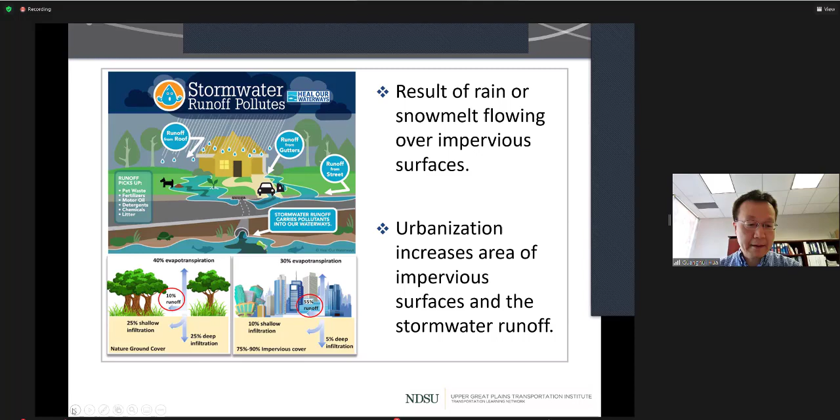So therefore, stormwater management has been a major concern for urban areas. And as we continue to expand urbanization, we need to properly manage stormwater runoff in order to reduce the flood risks and other concerns. And in addition to the stormwater quantity, stormwater quality is also another major concern, because when the stormwater runoff flows through the surfaces, the runoff can carry a large amount of contaminant.

Here I have several major lists of the potential contaminants resulting from stormwater runoff, including nutrients such as nitrate and phosphate, organic chemicals, oil and grease, heavy metals, primarily copper and zinc, and some suspended solids such as sand and other particles. And also, stormwater can also carry microorganisms such as virus, bacteria, and others.

And in order to manage stormwater runoff, cities and municipalities have developed many tools that can control stormwater runoff. Here I have several major examples. The first one is a detention basin. Detention basin is a dry pond. Basically, that basin will temporarily hold runoff and release over a designated time period, such that we can reduce the flooding risk when the storm event occurs.

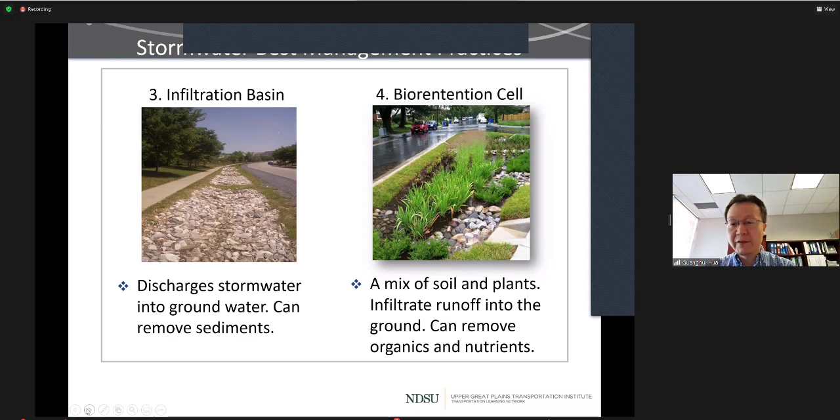And for this project, our focus is E. coli, because many of the current best practices are not effective at removing bacteria such as E. coli. So this is the focus of this project. And E. coli is widely used as an indicator of fecal contamination. And if there are any fecal contamination, E. coli can indicate the presence of those contaminants. And E. coli is a group of gram-negative bacterium, and they are rod-shaped.

So actually, most of the types of E. coli are harmless. They don't cause health problems. But however, certain types of E. coli, such as E. coli O157:H7, can produce a powerful toxin. So if people consume that E. coli contaminated water, some symptoms can develop, such as diarrhea, vomiting, and fever. So that's why E. coli is a major concern in surface water quality.

In order to regulate bacterial contamination in surface waters, EPA developed national recommended recreational water quality criteria. Based on the estimated illness rate, if the regulation is for 36 illness rate per 1,000 people, the 50th percentile is 126 per 100 ml. So if you want to reduce the illness rate to 32 per 1,000, the E. coli concentration for 50th percentile should be 100 per 100 ml.

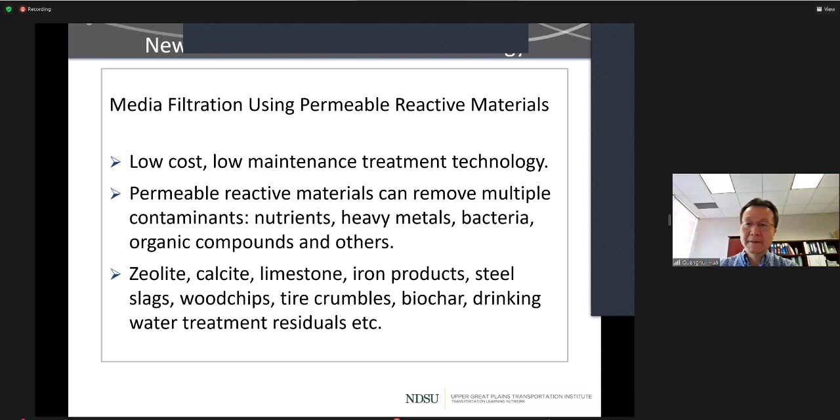Here I have two examples of media filtration technology to address stormwater quality issues. The first one is a steel slag filter. This filter is installed at Stillwater Country Club in Oklahoma, and this technology was developed by Oklahoma State University. When the runoff flows through the steel slag filter, nutrients such as phosphorus can be absorbed by the steel slag. The other example is called an iron sand filter.

This technology was developed by the University of Minnesota, and I have one installation example at Prior Lake, Minnesota. So basically, iron and sand are mixed and installed in the filtration channel. When the runoff flows through the channel, phosphate will be removed by the iron sand filtration. So these two examples give you an idea of how the field installation would look for media filtration for stormwater treatment.

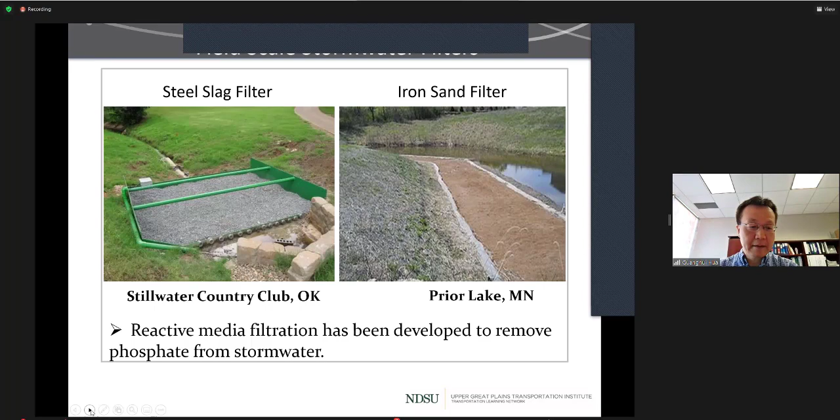And for this project, we focus on two recycled materials. The first one is called recycled steel chips. And we selected recycled steel chips for two reasons. The first one is that they are low cost and readily available for stormwater treatment. And the second reason is that when these steel chips oxidize, they can form iron oxide on the surface. And iron oxide is the material that we are using for stormwater treatment.

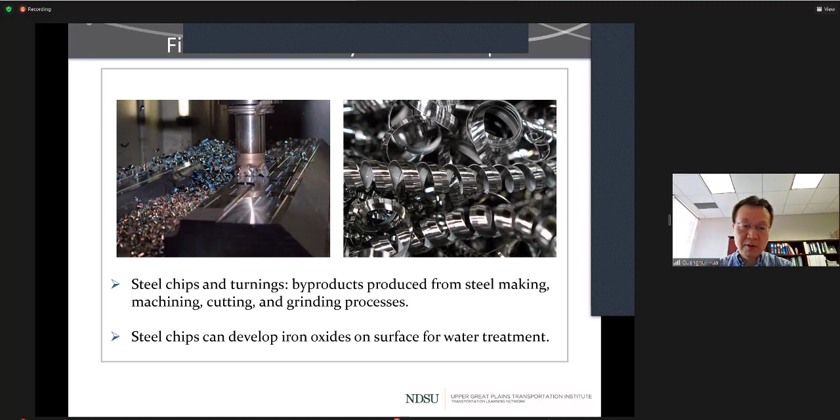And the second group of material that we are using for this project is called steel slag. Steel slag is a byproduct of steel making, and it contains also iron oxide and magnesium oxide. And they are produced during the separation of the molten steel from impurities. So basically, they are the impurity from steel making.

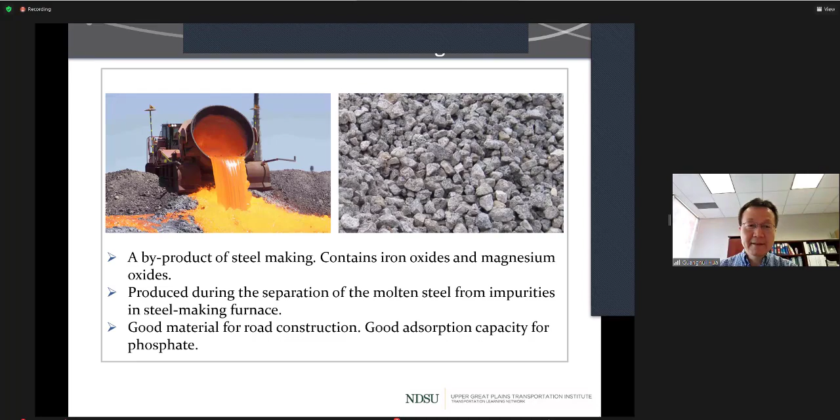And this material has been used by transportation agencies for road construction. They are very good material, alternative material for road construction. And we found out from other studies that steel slag also has a very good adsorption capacity for phosphate. So these are two materials that we focused on during the development of media filtration for this project.

So these are the project objectives for this study. So first, we want to develop a low maintenance, low cost media filtration system for stormwater treatment. Specifically, we are using recycled steel byproduct, including steel chips and steel slag. And the treatment goal of this filter media technology is to remove E. coli from stormwater runoff. And also, in addition to lab studies, we want to perform a field study to determine the long-term performance and the application potentials of this technology for real stormwater treatment. So these are the three objectives for this project.

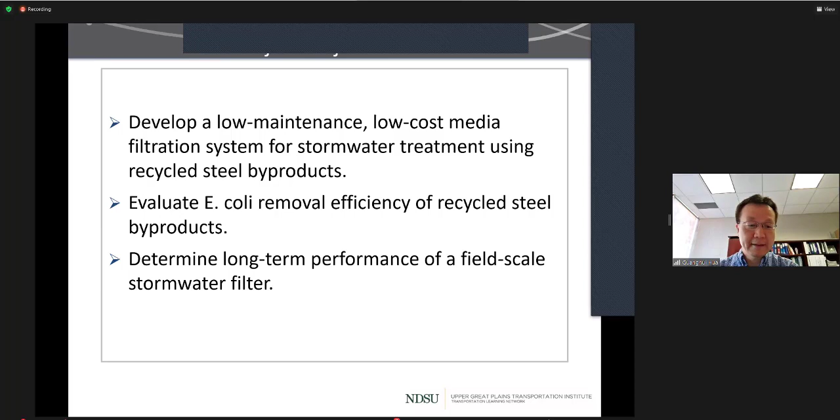And we divide this project into three phases. Phase 1 and phase 2 are lab scale, and we conduct batch adsorption studies to evaluate different materials for E. coli removal. And through the batch study, we were able to identify the most efficient materials for E. coli adsorption. Following the batch adsorption study, we conduct a column study under continuous flow conditions. And we select those materials identified from the batch study for the column study.

So after we complete the batch and the column studies, we identify a field study site at the city of Brookings in South Dakota. And we installed a field scale filter, and we determined the long-term performance of the field scale filter over a 3-year period to evaluate E. coli removal under field conditions. So these are the three phases of this project, and I'm going to present the results based on the three phases.

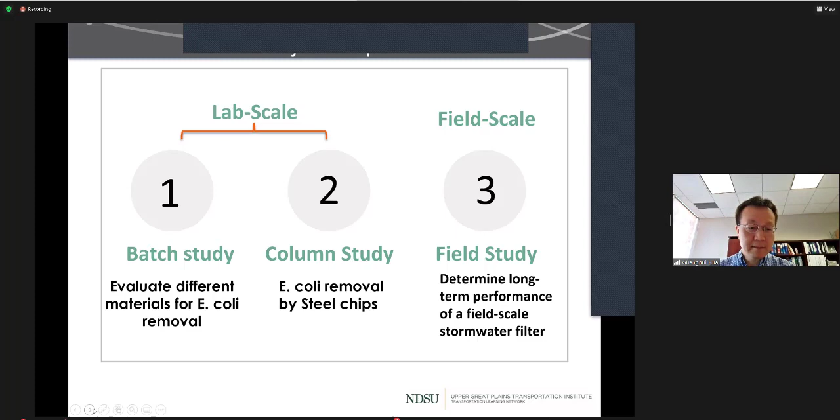So during the batch experiment study, we selected 4 materials, including limestone and zeolite. These are the 2 natural materials that are readily available. And these 2 materials have been evaluated as stormwater treatment material, filtration material for phosphate removal. And we want to know whether these 2 materials can also remove E. coli or not.

In addition, we select 2 recycled steel byproducts. Steel chips, and we collect material from 2 recycling companies, one located in Sioux Falls, South Dakota, and the other one located in Marshall, Minnesota. So we collect recycled steel chips from 2 locations. And also we collected steel slag from a steel making company, Nucor Corporation in Nebraska.

And this is the batch study design. First, we select the adsorption material, and we use sieving to collect the material that is in the 1 to 2 millimeter range. And following that, we create simulated E. coli solutions. So basically, we grow the E. coli media in the lab, and then we dilute the E. coli culture into different concentrations from 10 to 10^4 per milliliter.

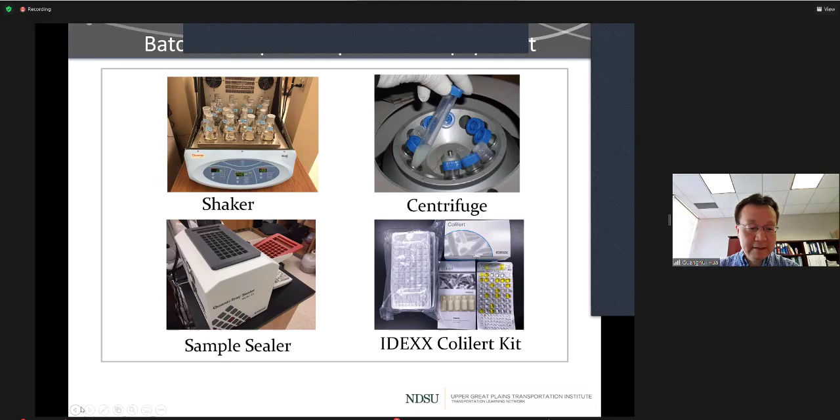In addition, we found that the adsorption capacity of steel chips is more than 1,000 times that of the other materials. So we had to divide the steel chip result by 1,000 in order to put all the data points into one scale. Therefore, steel chips are much more effective compared to other materials. We also found that steel slag is a better adsorbent material than zeolite and limestone, which are natural minerals. So this is the result we found based on the first set of batch adsorption study.

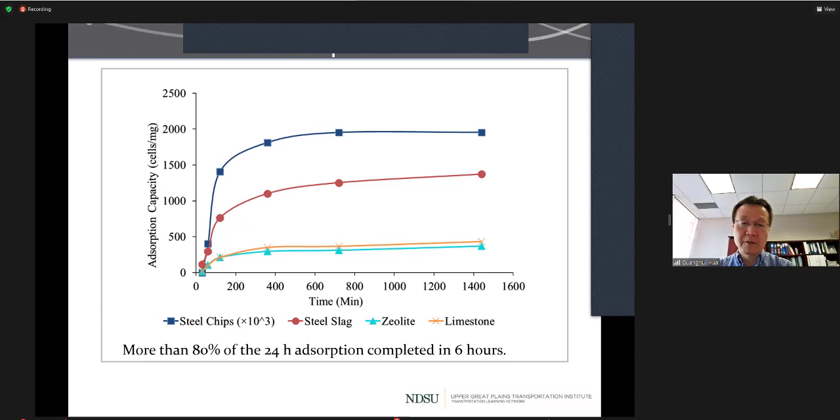We also evaluated the impact of different influent E. coli concentrations on the adsorption efficiency of the four materials. For steel chips, over a wide range of influent concentrations, the removal efficiency did not vary much. It varied from 89.5 to 92.7 range. So we were able to achieve very good removal efficiency over a wide range of influent concentrations. We found that the influent concentration had a larger impact on steel slag, limestone, and zeolite. We also found a similar removal efficiency order as the kinetic study.

So overall, based on the E. coli removal at different concentrations, we conclude that steel chips are much more efficient than steel slag, which is more efficient than limestone and zeolite.

For temperature impact, based on our result for steel chips and steel slag, we learned that for 20 degrees C and 30 degrees C, the differences are minor, and we were able to maintain good removal for the two temperatures. However, when the temperature dropped to 5 degrees C, the removal efficiency substantially reduced. Therefore, we expect that during early spring runoff, when the stormwater runoff temperature is close to the freezing point, the removal efficiency will be reduced. This is likely because the mobility of E. coli under low temperatures will become much less compared to normal stormwater runoff temperatures.

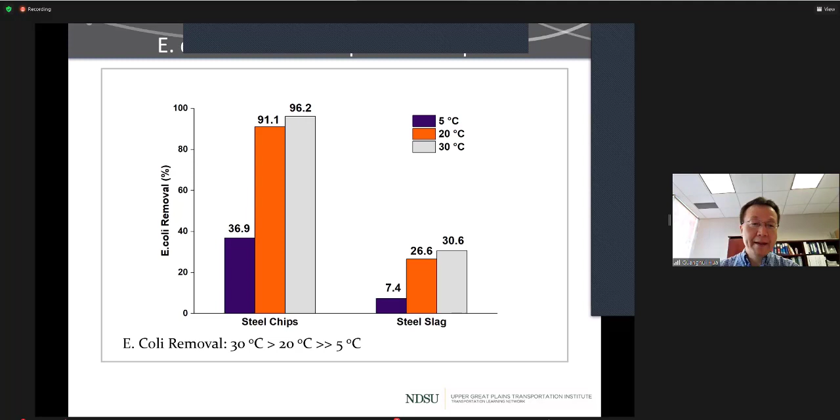We also looked at the pH impact. We know that the stormwater runoff pH can vary based on road conditions and seasonal variations. Based on our batch adsorption study, we learned that acidic pH can help the removal of E. coli. However, the difference between pH 5 and neutral pH is minor. We achieved good removal for the two pH values. However, at high pH values, the removal efficiency substantially reduced. So basically, under acidic conditions, steel chips and steel slag had a better performance compared to alkaline pH conditions.

And this is the summary based on the batch experiment. First, perhaps most important, we identified that steel chips are much more efficient than steel slag for E. coli removal, and steel slag was better than limestone and zeolite. So this is the order of removal efficiency among the 4 tested materials. Also, steel chips exhibited at least 1,000 times higher E. coli adsorption capacity than other materials. And environmental conditions can impact E. coli adsorption; the adsorption typically increases with increasing temperature, and increases with decreasing pH values.

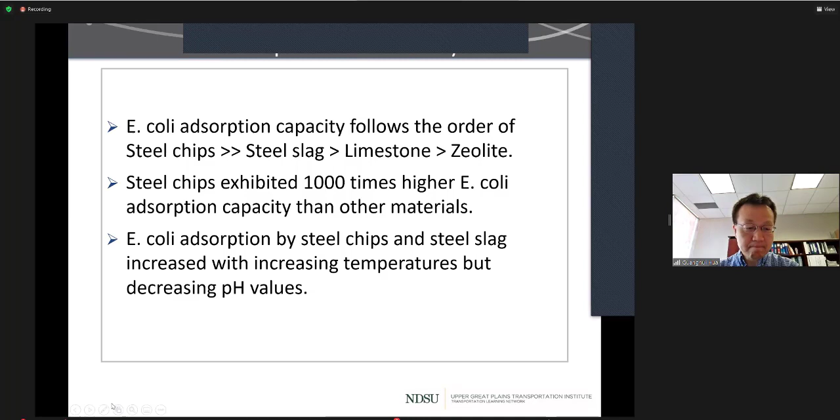So after the batch study, we identified steel chips as the most efficient E. coli adsorbing material, followed by steel slag. Therefore, we decided to perform an additional column study to evaluate the removal efficiency of steel chips under continuous flow conditions, because the column experiment conditions are closer to real stormwater filter treatment conditions, as we continuously push the water through the filter medium.

So this is the setup for the column study. We have a glass tank that holds the influent, simulated stormwater runoff that has different E. coli concentrations. We use a peristaltic pump to pump the influent through the column that contains steel chip media. And we measured the influent and effluent concentrations to determine the removal efficiency during continuous flow conditions.

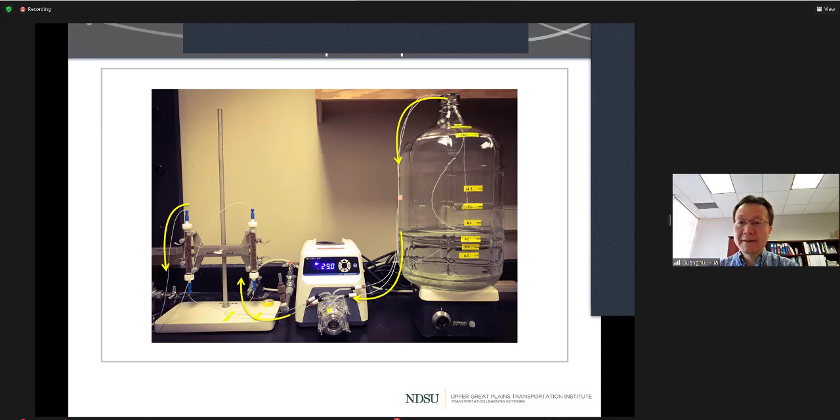So once again, these are the materials that were used for the column study, and we sieved the material into different sizes. 0.5 to 1 is considered fine material, then 1 to 2, 2 to 4, and 4 to 8 millimeter. The 4 to 8 millimeter size is considered coarse material.

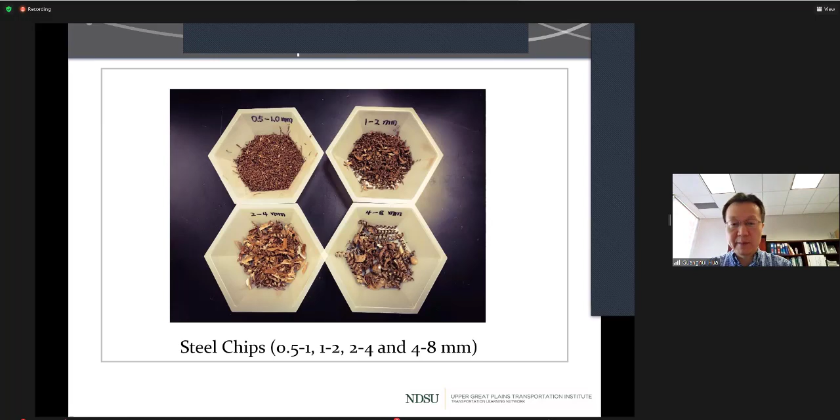We look at the size impact, different sizes of material on E. coli removal. And we learned that as the size becomes bigger, the removal efficiency gradually declines. For example, for the fine size particles, 0.5 millimeter to 1 millimeter, we were able to achieve constantly about 99% removal. And as the size increases, the removal efficiency gradually declined to about 58% for the highest size material, which is 4 to 8 millimeters.

And also we learned the removal efficiency was very stable over the 72-hour period, even though there is some early breakthrough between 0 and 6 hours. But after 6 hours, we were able to maintain very stable removal. And the removal efficiency did not decline between 12 and 72 hours. So therefore, this result is important, and this can indicate that steel chips are able to maintain stable removal over a long period up to 72 hours.

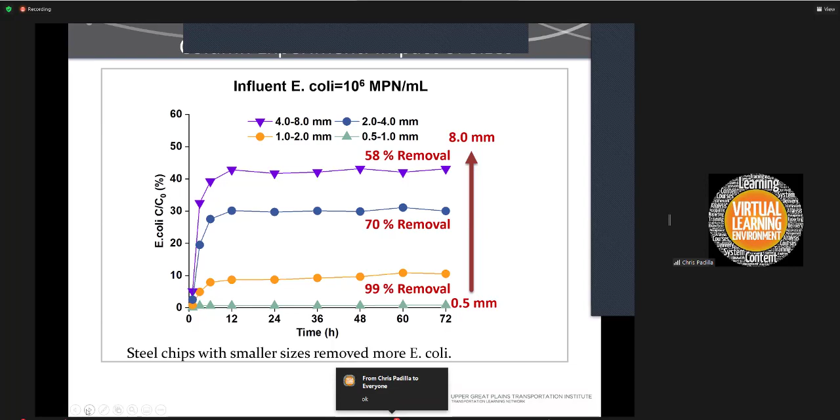Dr. Hua? Yes. So just to check the understanding, are the percent removal stats showing the percent of the total coliform loading or the percent of the 24-hour removal? The removal percentage indicates how much is being removed by the steel chips. For example, if the influent concentration is 100 per ml and 99% is removed, then we only have 1 in the effluent. Okay, thank you. And the y-axis indicates effluent concentration percentage. So 100 minus the y-axis is the removal efficiency.

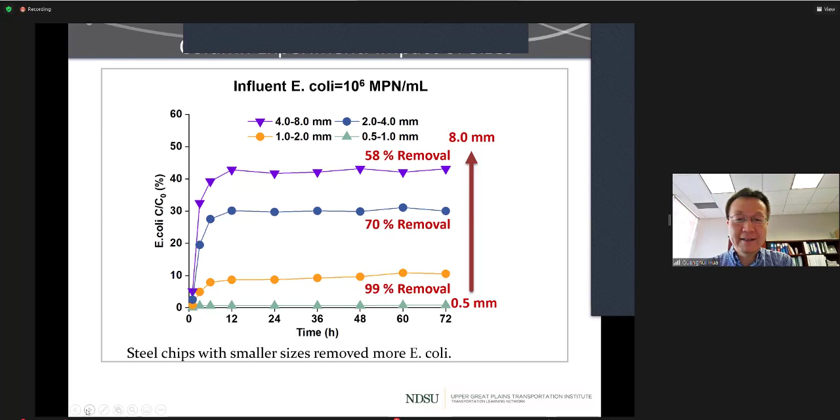So here we also look at the impact of contact time on the removal of E. coli through the column study. Once again, the y-axis indicates the ratio between the effluent to the influent. And I put the removal numbers for each of the lines for easy understanding. And we evaluate 3 contact times. EBCT means empty bed contact time. That's the travel time of water through the filter column. And we evaluated 5 minutes, 10 minutes, and 20 minutes.

And based on our results, we observed that when the EBCT or contact time is 5 minutes, we were able to maintain 87% removal over 72 hours. And when we increase the contact time to 10 minutes, we were able to achieve, I think, roughly 90% removal. And when we further increase the contact time to 20 minutes, we were able to achieve 98% removal.

Overall, for a wide range of contact time, 5 to 20 minutes, we were able to achieve very good removal efficiencies. So that means this filter technology can be adopted to different stormwater events that have different flow volumes, which will result in different filter contact times.

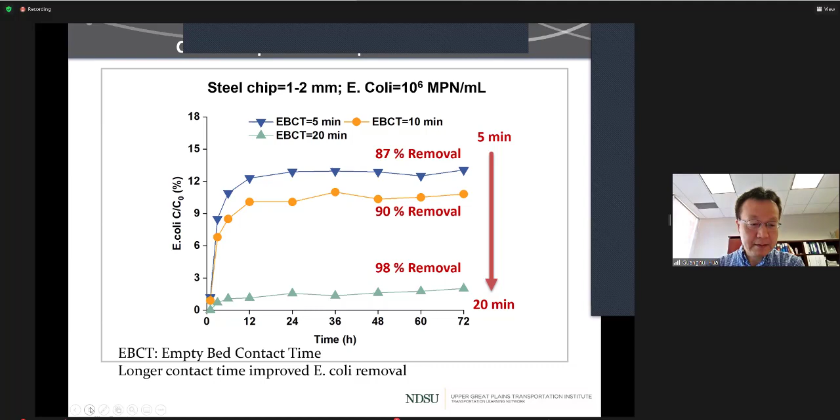And also, in order to confirm the pH impact from the batch study, we also compared the pH impact on the E. coli adsorption efficiency. We did observe that the acidic environment favored E. coli removal. So at pH 5, we were able to achieve 95% removal. And at pH 7, the removal efficiency reduced to 90%. And we observed some interesting results at pH 9. If you recall, during the batch study, pH 9 had the lowest removal efficiency. We did observe the lowest removal efficiency at the early stage of the column operation at 87%. However, as we continued to increase the operating time, the removal efficiency gradually increased to 92%.

And we attributed this phenomenon to the ferric coagulation impact. We observed that some of the dissolved iron was able to coagulate E. coli and form a deposit. That's what we observed from the column study. So basically, in addition to the filtration and adsorption impact, we found at high pH values, the dissolved Fe is able to coagulate and form flocs that could trap E. coli from the water.

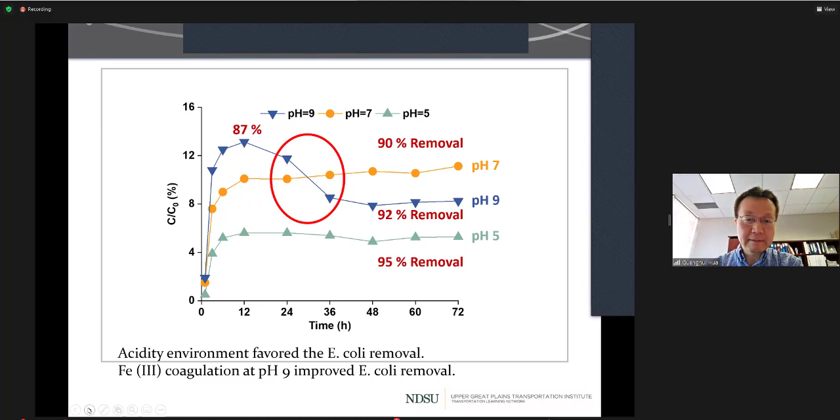Organic matter is another competitor for E. coli adsorption because when the stormwater travels through the surface, it can pick up some organic compounds, and we call those compounds natural organic matter. And we want to know whether those organics present in the stormwater runoff can impact E. coli removal or not. And indeed, this figure shows the attached E. coli against the different natural organic matter concentrations.

So the blue circles indicate there is no natural organic matter. Then we added 5 milligrams per liter of organics into the influent as indicated by the yellow triangles. And we increased the organic matter concentration to 30 milligrams per liter as indicated by the green triangles. And we found that as we increase the concentration of organics, the E. coli adsorption efficiency declined. The percent decline is 25% for 5 milligrams per liter and 50% for 30 milligrams per liter. So therefore, if the stormwater has high concentrations of organics, it may reduce the E. coli removal efficiency.

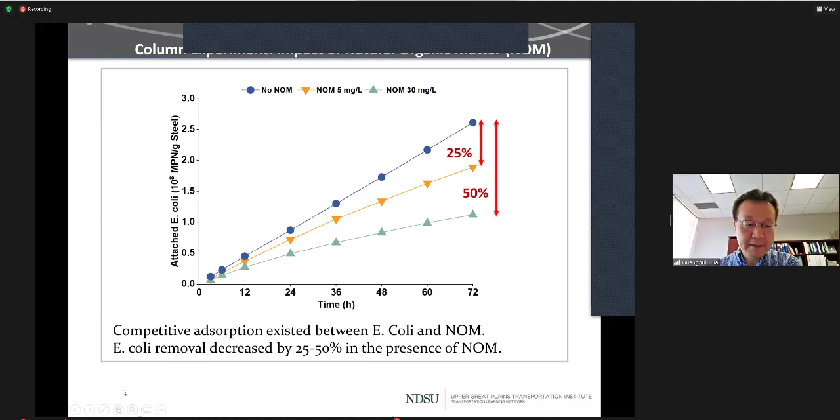And this figure shows the E. coli removal mechanism, how steel chips remove E. coli from stormwater runoff, and why pH and organic matter can have impact on E. coli removal. And we know that E. coli in aqueous solutions has some charge on the surface. Typically, E. coli species has a negative charge on the surface.

And we know that steel chip surfaces have a lot of iron oxide. Iron oxides are positively charged. So because the charges on the E. coli and the steel chip surface are opposite, they tend to attract each other through electrostatic attraction. So that's the reason why steel chips are very efficient for E. coli removal.

And under high pH conditions, we have a high concentration of hydroxide, which is OH minus, negatively charged. And those OH ions will compete for the adsorption site. So therefore, we have high removal under low pH conditions. Similarly, many organic compounds are also negatively charged. They can compete for the adsorption site. So this can explain the observed impact of pH and organic matter on E. coli removal by steel chips.

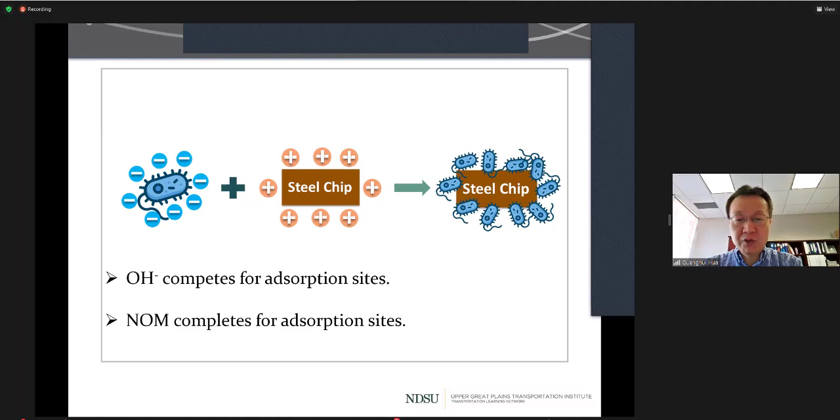And in order to verify our hypothesis, we performed some microscopic scanning using SEM technology, scanning electron microscopy, to look at the steel chip surface before and after the treatment. So figure A shows the steel chip surface before the experiment. As you can see, there are lots of crystal forms on the surface. Those are the iron oxide formed by iron and oxygen. And after treatment, we found a high density of rod type bacteria. So therefore, we verified E. coli bacteria can be effectively attached to the steel surface.

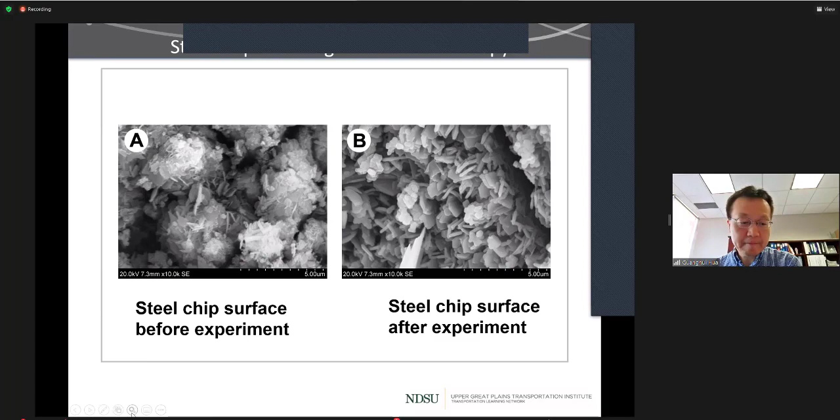So this is a summary from our column study. The steel chip column maintained steady E. coli removal up to 72 hours. So we were able to maintain steady removal over a long period. And also environmental factors could affect E. coli removal. The column exhibited better E. coli adsorption under small sizes, long contact time, and low pH levels. And also the organic matter present in the runoff can negatively affect E. coli adsorption.

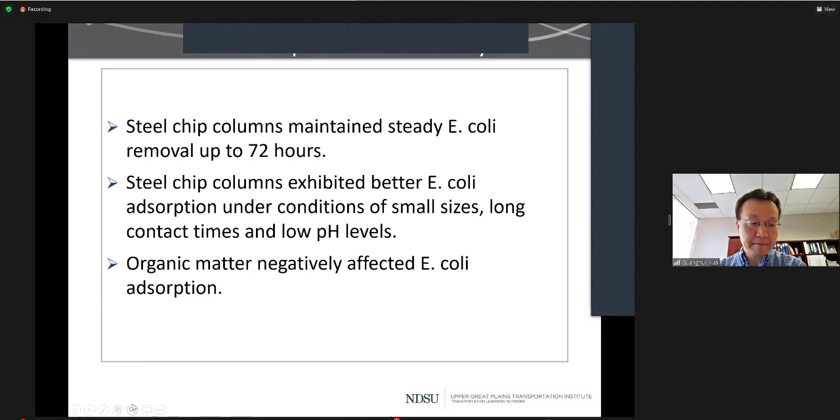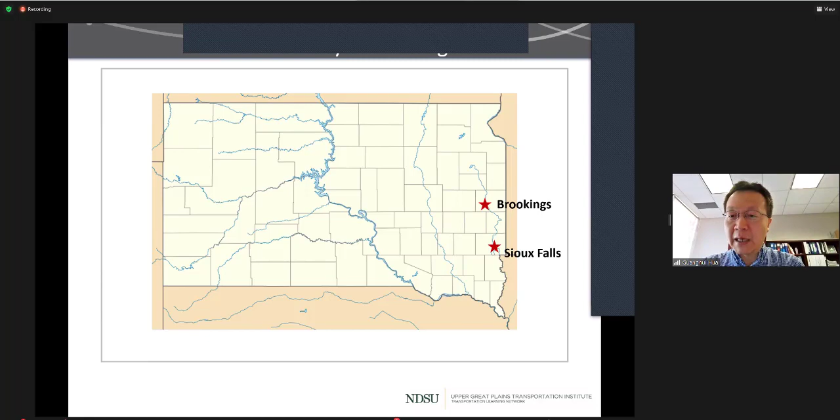So with the success of batch and column studies, we identified steel chips as the most effective material. So therefore, we want to test those materials under field conditions to verify their performance and promote full-scale applications. So we identified a stormwater runoff site at the city of Brookings. For those who do not know where the city of Brookings is, Brookings is located in eastern South Dakota. It's about 60 miles north of Sioux Falls.

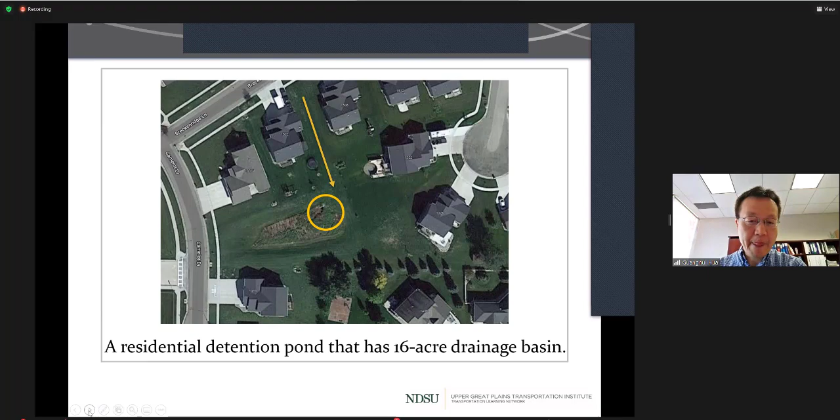And we collected two materials for this study. We use the steel chips as the major filter media for E. coli removal. We also collected steel slag as a supporting media to support the performance of the steel chips. And steel slag can also improve the E. coli removal because it is also efficient compared to natural minerals such as zeolite and limestone, based on our batch study.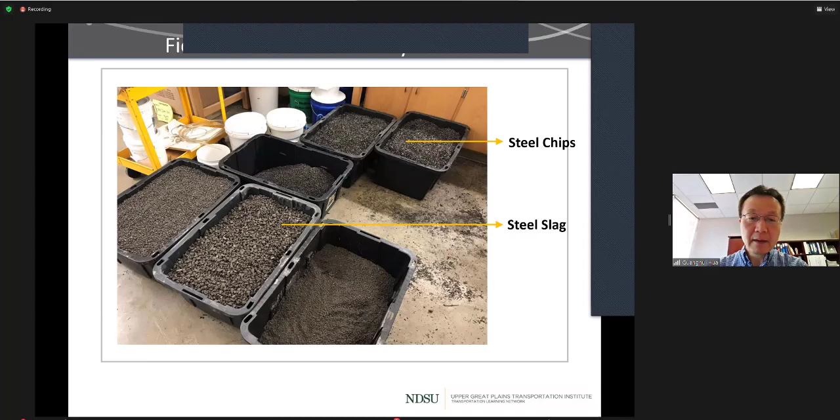And we collected steel slag from Nucor Steel, Norfolk, Nebraska. And we processed the material into two sizes, large and small, which are 4 to 9.4 millimeter and 2 to 4 millimeter respectively. And for steel chips, we collected from a recycling company in Marshall, Minnesota. And we also processed the material to the same size range as the steel slag.

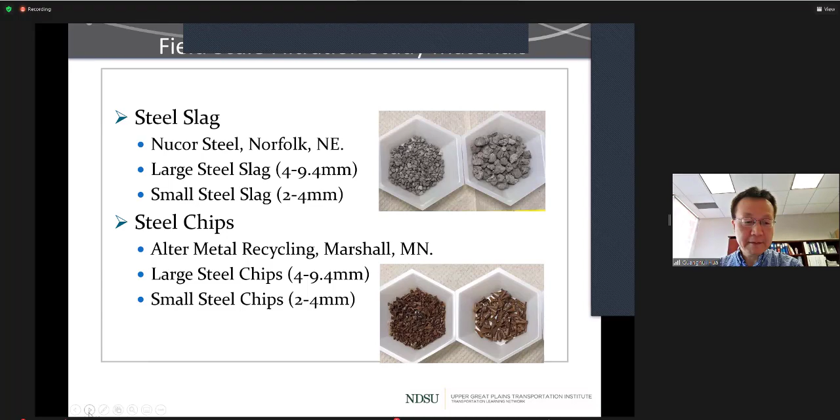And these two photos show how our graduate research assistant installed the filter media. So basically, we placed the structure at the inlet of the detention pond, and then we mixed steel slag and steel chips uniformly, and then we added them to the steel structure.

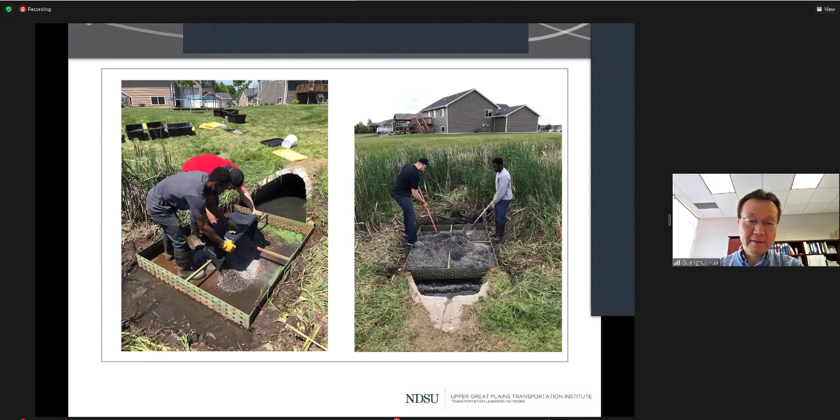And these two photos show the treatment of the stormwater runoff on the real storm event. So basically the water will flow through the pipe and then through the filter media. And we collected samples from the inlet and the outlet to compare the treatment performance for various storm events.

And these are the media conditions for the 3-year study. In 2018, we used 70% steel chips and 30% steel slag. In 2019 to 2020, we used 50% steel chips and 50% steel slag. So the total study period was 3 years.

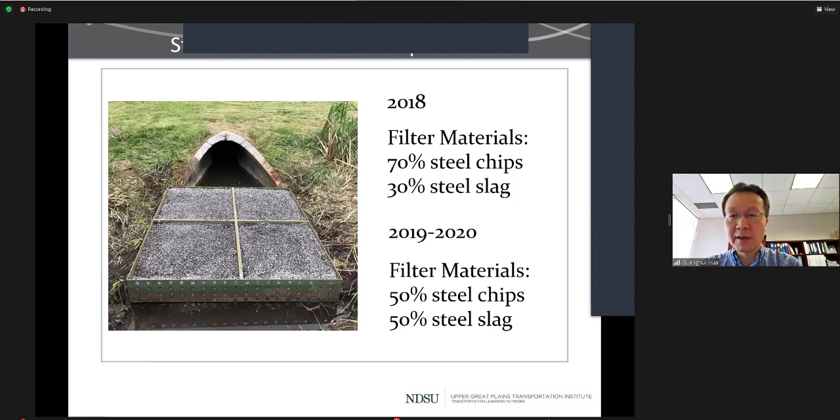And this figure shows the E. coli removal, the E. coli in the influent and effluent of the steel filter over different stormwater events. We conducted experiments for 4 events, and also we collected samples at different storm times. And on average, we found that the steel byproduct filter removed about 50% of the influent E. coli in 2018.

Similarly, in 2019, we also evaluated 4 storm events, and the average E. coli removal was 54%. And one thing I want to point out here is that we found in this detention pond the influent E. coli concentration varies. For example, in 2019, the influent concentration varied from about 1,000 to over 16,000 per 100 ml. So we found a large amount of E. coli in this detention pond, and we were able to remove about 50% through the filter media.

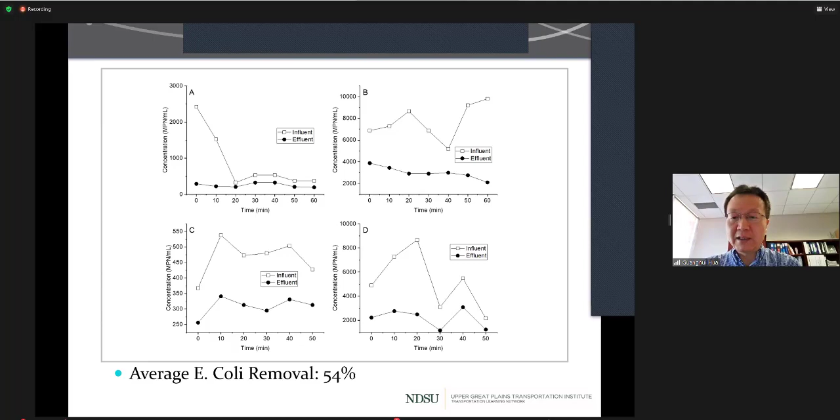So in addition to E. coli, we also monitored phosphate removal. Based on our past study, we know that steel chips and steel slag are very good materials for nutrient phosphate removal. And here we monitored the phosphate removal in 2020. We found that the average percentage removal was 51%.

So we were able to achieve not only E. coli removal, but also we were able to remove phosphate. So therefore, this filter technology using steel chips and steel slag was able to remove multiple contaminants from the stormwater runoff.

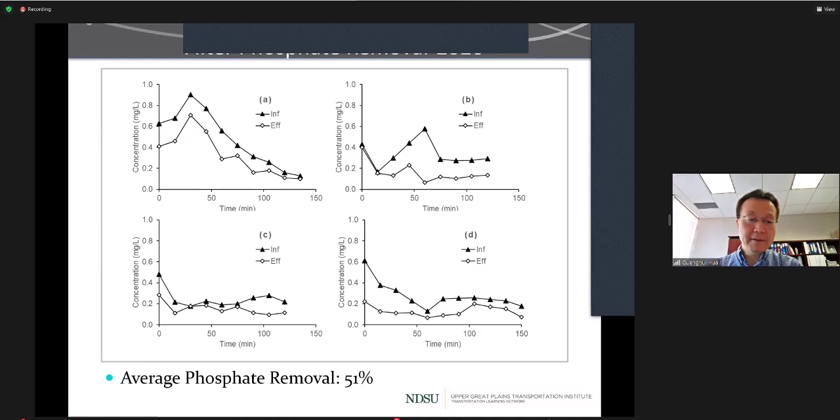So these are conclusions from our batch, column, and field scale study. First, steel chips showed much higher E. coli removal capacity than steel slag, limestone, and zeolite. The steel chips and steel slag filter removed about 50% of the E. coli and about 50% of the phosphate during the 3-year field study at the City of Brookings. And overall, we conclude that recycled steel byproducts are efficient filter materials for E. coli and phosphate removal from stormwater runoff.